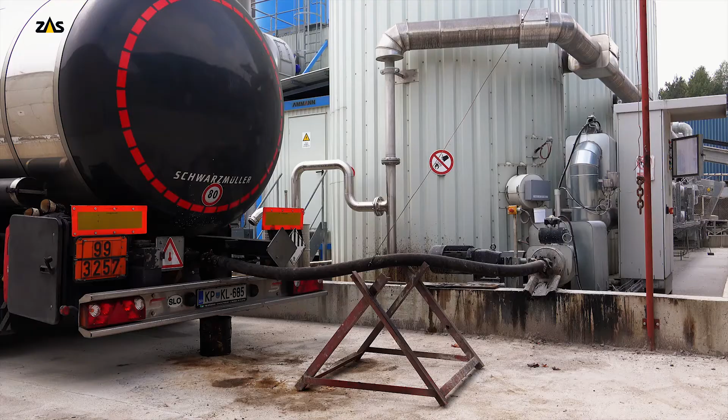Unfortunately, asphalt paving is still being carried out nowadays as it was decades ago. And in addition to that, workers are exposed to increasing ambient temperatures due to climate changes. The demand for bitumens, which require high production and laying temperatures, simply worsens the problem. And for the cherry on the top, the war in Eastern Europe showed our energy vulnerability. The prices of energy and raw materials have increased enormously.

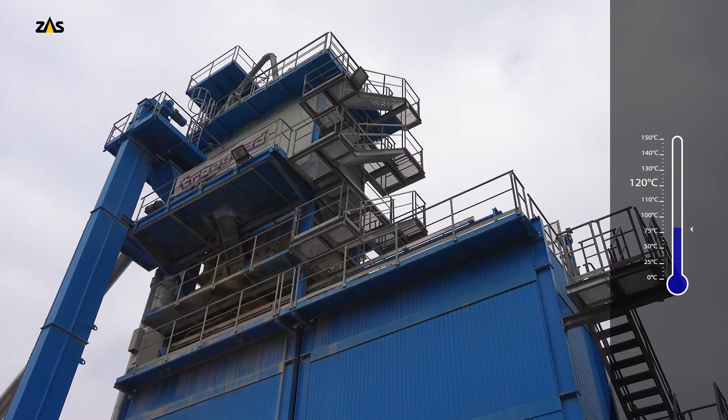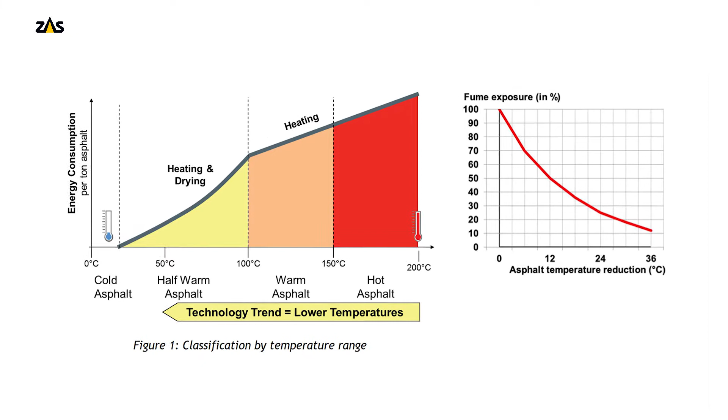Alternative solutions such as porous and warm mix asphalt can improve work conditions while reducing energy demand and environmental impact. However, we are still using it to a very limited extent. Why? Perhaps the reason lies in the cost assessment, which does not consider that, with the use of digital technologies, they are quickly repaid. Therefore, the question is, what can the industry do to respond to the described challenges? In Slovenia, we decided to take the following steps.

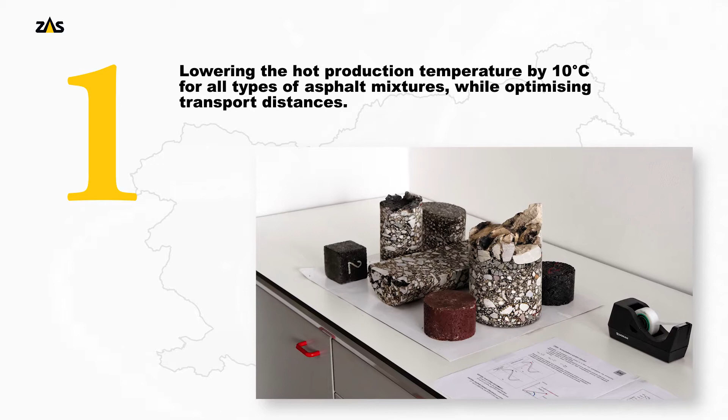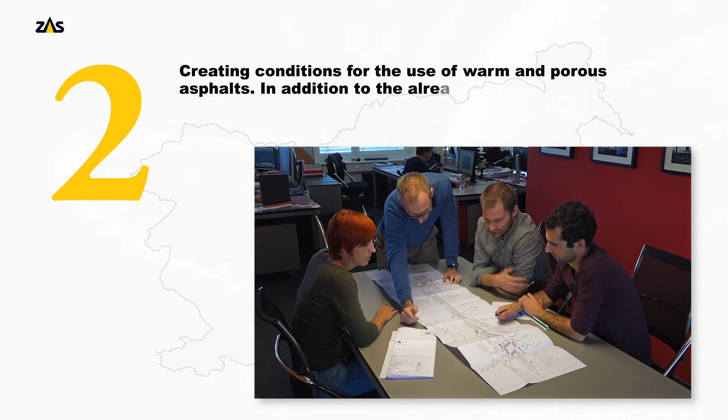Number 1. Lowering the hot production temperature by 10 degrees Celsius for all types of asphalt mixtures, while optimizing transport distances. Number 2. Creating conditions for the use of warm and porous asphalts. In addition to the already adopted technical specifications, we encourage clients to use them more. Number 3. Increasing the reuse of reclaimed asphalt into new asphalt.

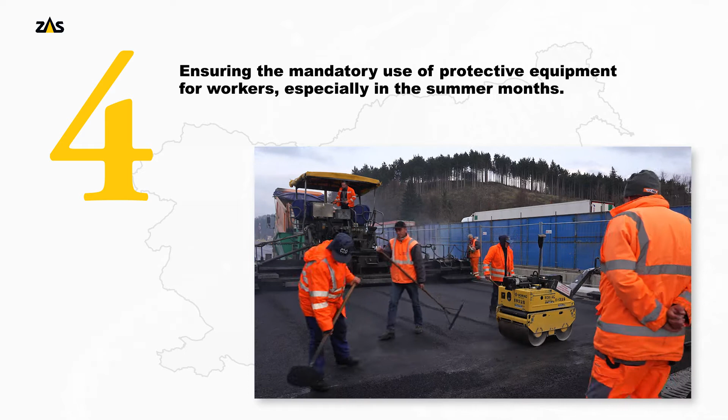Number 4. Ensuring the mandatory use of protective equipment for workers, especially in the summer months. Number 5. Preparing proposals to stimulate the introduction of proposed innovations. Number 6. Involve digital solutions in all mentioned actions as much as possible.

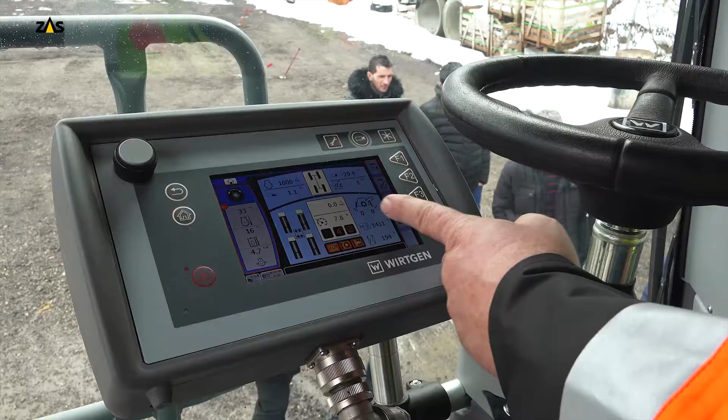What do we think stakeholders in the asphalt industry should do? And what do we expect from the Asphalt 4.0 conference? In the future, it is expected to finally start working more and more digitally and using newly available materials, machines, equipment, and technological procedures. There was a lot of innovation done, and we do not use it.

We need changes in the European standardization system because right now, CEN is more a barrier than a solution. EAPA has been doing a good job in describing and giving visibility to digital technologies, but in the future it should also support administrations by preparing samples of public procurement, which can incentivize the immediate use of all available digital methods and techniques.

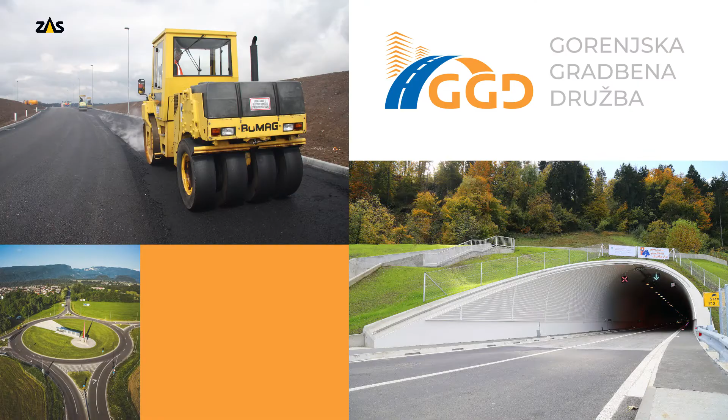Administrations and road owners have to include all the latest technologies in the public procurement. Industry stakeholders must adapt their production systems and get ready for the deployment of such technologies whenever required. All with the goal of implementing Asphalt 4.0 for sustainable roadways.